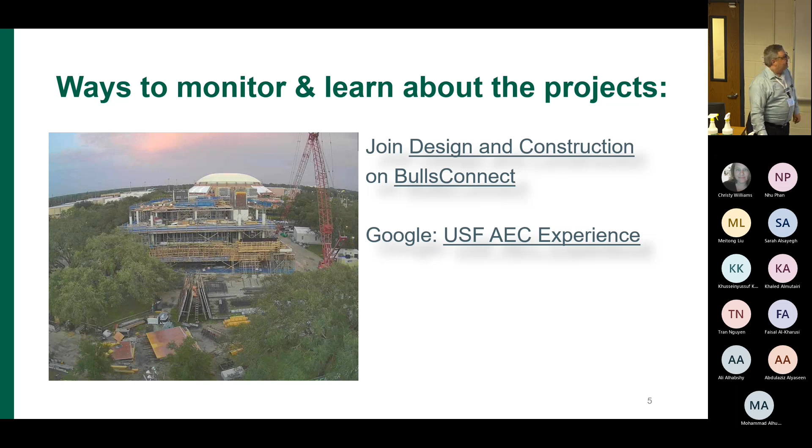So I'm going to turn it over to Dylan and let you talk about general ideas of the different structural systems. And did you happen to see how many do we have online? I saw one, there's at least 3 or 4 online. Oh excellent, good, all right. And then we have one student in the room. So welcome, one student in the room, a bunch of engineers in the room, and I do know that when we post this on YouTube, it does get additional views too. So okay, outstanding, all right.

Well thanks Steve for the setup. Online, can you hear us just fine? Yes, great, thank you. All right, so start with just a general overview of structural systems and kind of the different structural systems that are out there.

And then we're going to go from there and actually talk about 3 specific buildings on campus that Steve mentioned, and talk about the different systems that were used for each and a little bit of why. You know, every building really based on its layout and the market and the contractor that we have building it kind of has different needs. And so that's why when you go around and see jobs under construction, you see all kinds of different materials out there. So we'll just start kind of from the basics.

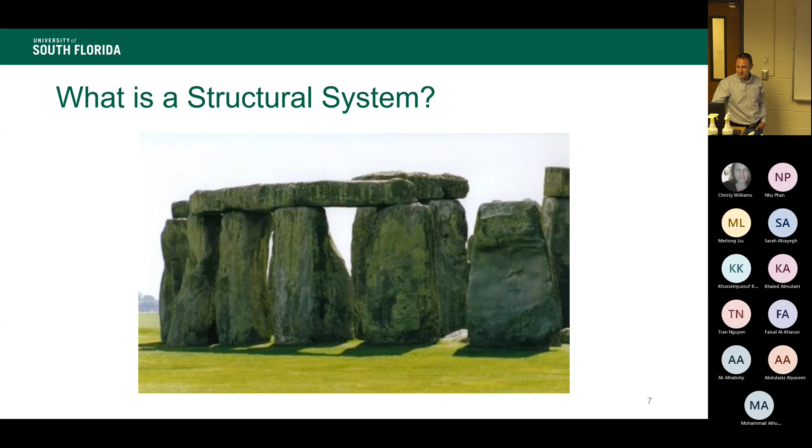You know, what is a structural system? You know, this is obviously a very old structural system, but one that's standing the test of time nonetheless. So in its simplest forms, your structural system starts at the foundation, right? You're at the ground, and this is what your building is going to actually sit on and transfer the weight and the loads of the building down into the ground.

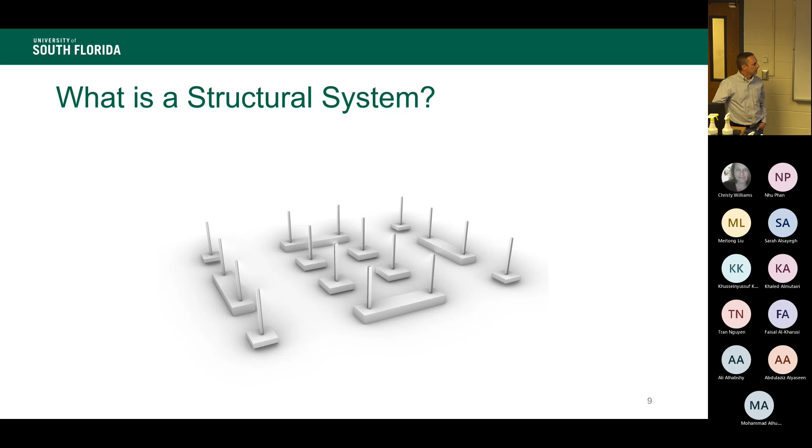And then on top of that, we would have vertical elements, which we are calling columns. And the columns are what take the load from the floors. So floors can be framed out in many different ways. Right here is an example where we have a series of beams. In this case, these would be steel beams, but they could be concrete beams. So these are intended to have the load that your tables, your desks, the people that are in the room, it takes all that weight and gets it out to the columns down to the foundation.

But to just have a building up like this, there are ways you can connect the beams to the columns to keep the columns from wanting to just topple over. But oftentimes what we use is bracing.

So here I've turned on what we call X-bracing, for obvious reasons. Sometimes in the place of those we actually have walls, and those can be done out of concrete. What those are intended to do is keep the structure from wanting to topple over when wind blows on the building, or if you're out west, seismic activity wants to shake the building.

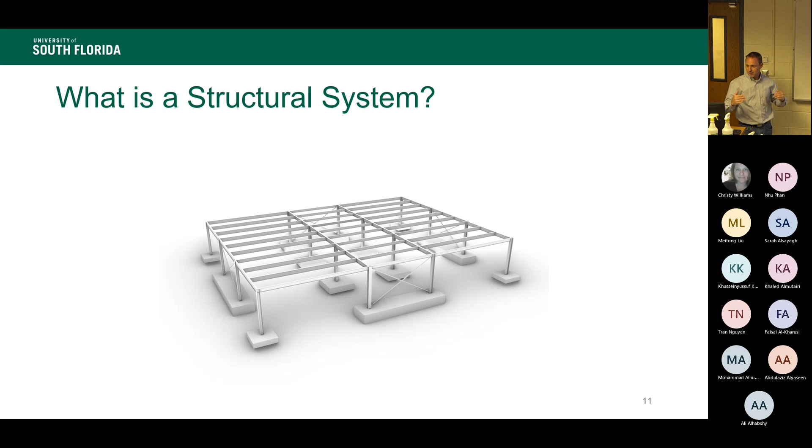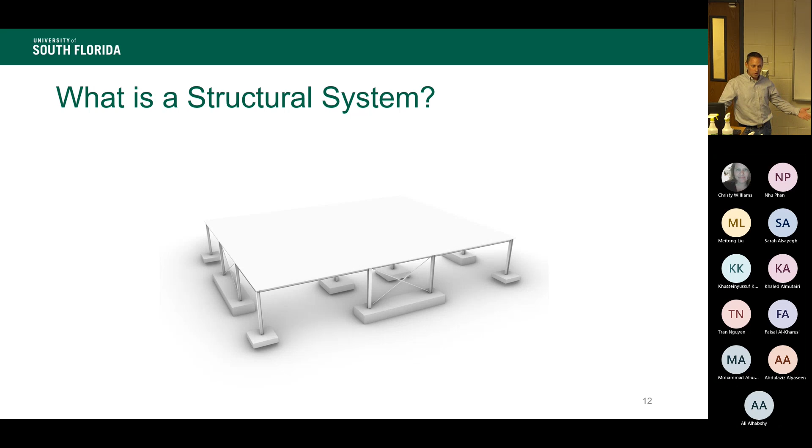This is what takes the load from the floor levels down to the ground. And then we tie all these together with the floor system. Oftentimes you end up with a concrete floor, but it could be wood, or made of several materials. This is the actual working surface, whether it's where a person walks, or the roof on top of the building where your envelope is.

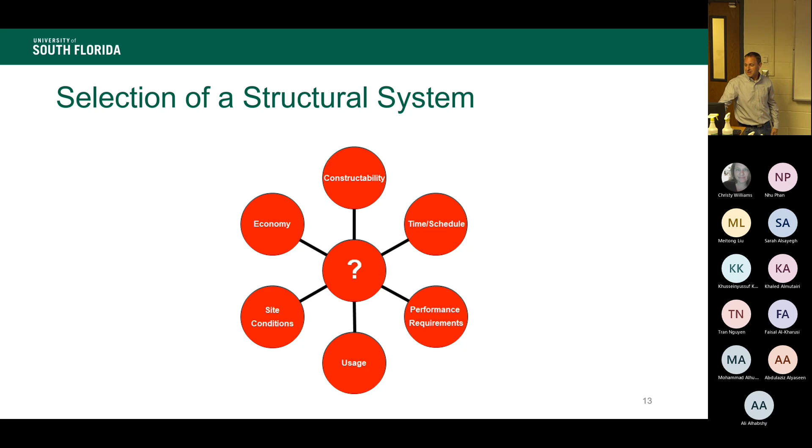So the selection of a structural system, as we said earlier, many things can go into that. A lot of times it's time and schedule. Sometimes it's what's required for this building to perform its intended use. The site conditions, the daily economy, can change. From one year to another, a building might be better for steel, and the next time might be good for concrete. But where we always start is, what's the use?

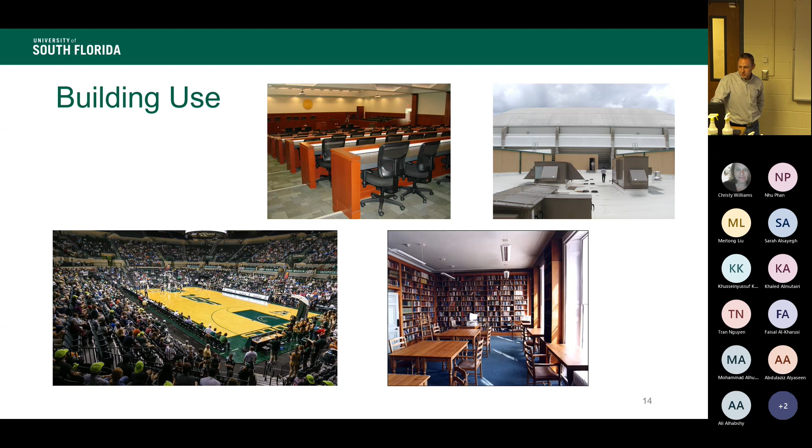You can see here we've got a courtroom, which has a few people in it spaced out. On the upper right, that's a roof, so there's not going to be a lot of load other than the mechanical equipment. Lower right, you see a library. Libraries are actually, although they're quiet and not real active, they require quite a bit of load because the books are pretty heavy. And then we have our Yuengling Center -- I still call it the Sun Dome. That's going to stack thousands of people in it at one time, jumping around and having a good time. So we first have to understand what the use of the building is and how it's going to be loaded.

Then we want to take a close look at the economic considerations. So what are materials costing? Right now we're in a time period where material prices are really going up high, and they've escalated. So on new projects today, material cost is very critical, because it could actually make or break a project. What labor is available out in the workforce, and what equipment is needed.

How quickly is the building needed for the owner? One of the buildings we're going to talk about is the new indoor practice facility for the football team. It's needed very quickly because we got a great new coach here, and he's looking to build and do new things, and it's critical for our recruiting to have that building online as quickly as possible. So schedule is really important. And then maintenance costs -- we have to not only look at building it from the beginning, but also how well this building is going to be maintained, and what it's going to cost to maintain over its life.

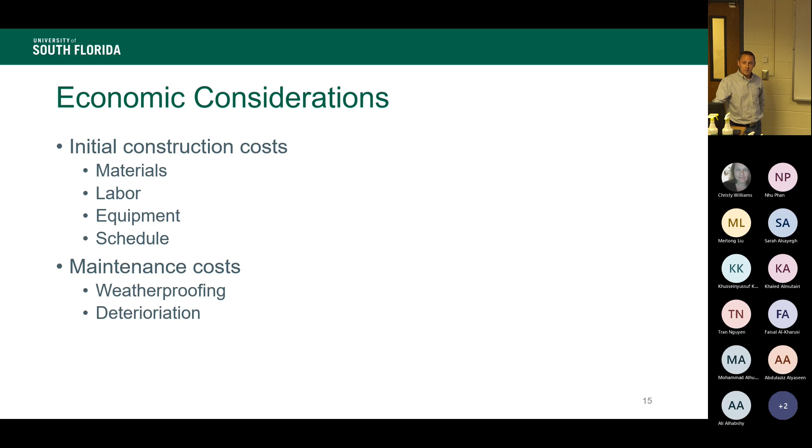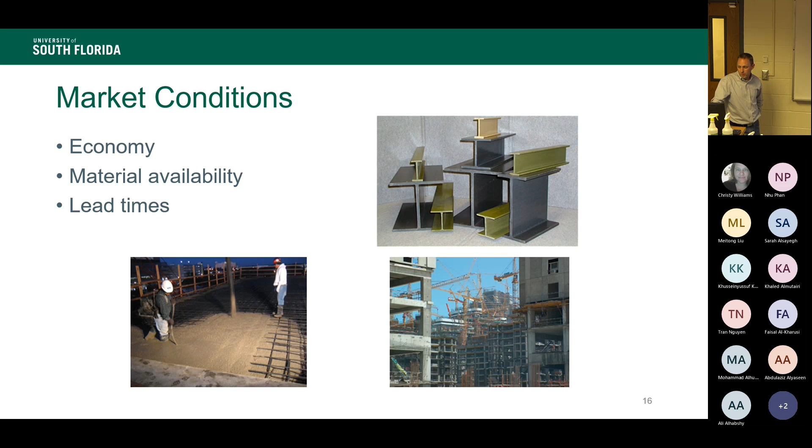So those are some market conditions. The economy weighs into it. What materials can we get? How long does it take to get the materials? These all weigh in, along with the schedule.

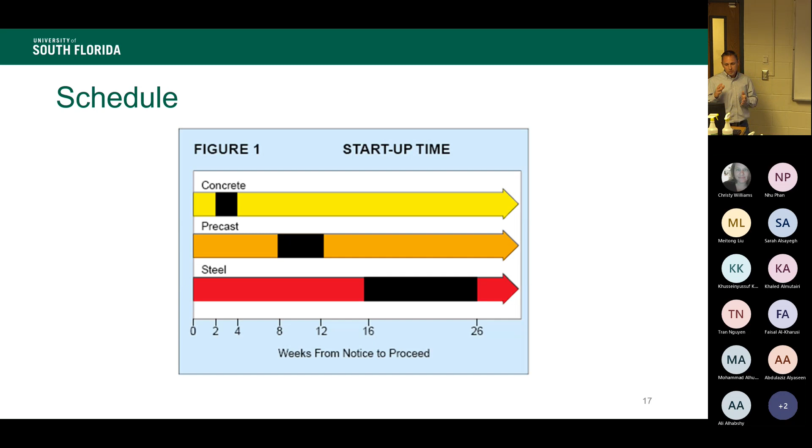Sometimes we look through different systems, and a couple that are pretty common are concrete and steel. Precast is a form of concrete -- that's concrete that's cast off-site and then brought to the site in pieces. But a concrete job, like the USF Honors Project, they can get out and form and start to pour pretty quickly. Steel has a lot of prep work that has to be done in a shop, so concrete can get going real quick. Steel takes a little longer, but it can actually be erected very quickly. So those are things that have to be weighed into when we talk about schedule for buildings.

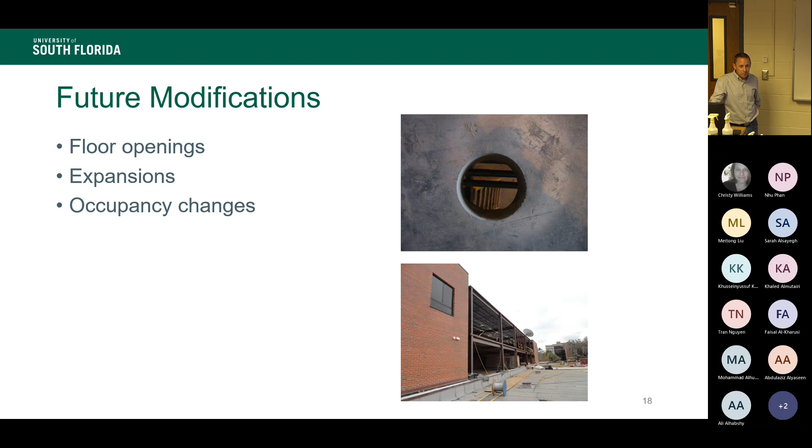And then we do have to look at what future modifications this building is going to need. Are we going to have to cut new openings in it at some point in the future? Are we going to have to expand the building? Is the type of usage, the occupancy, going to change at some point? So these are all things that are good to know up front as we select a structural system.

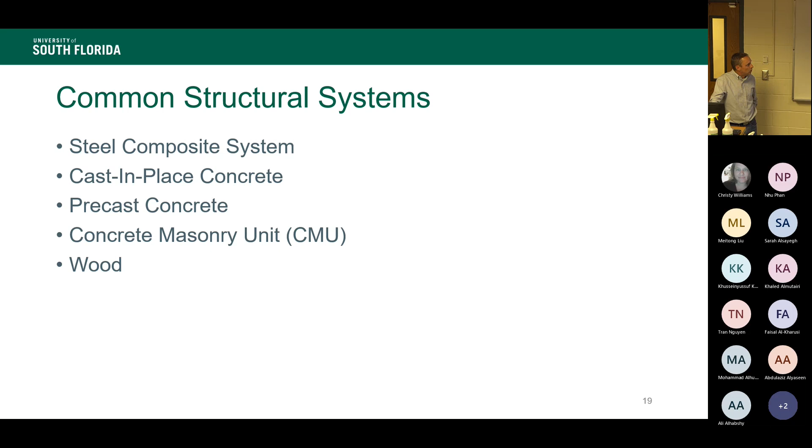So the common systems are steel, cast-in-place concrete, precast concrete, masonry units -- concrete masonry units, also known as CMU -- and then wood. So just real quick, let me give you an image of some of these, and this should start to stand out for something maybe you've driven by on job sites and seen before. So this would be an example of a steel building.

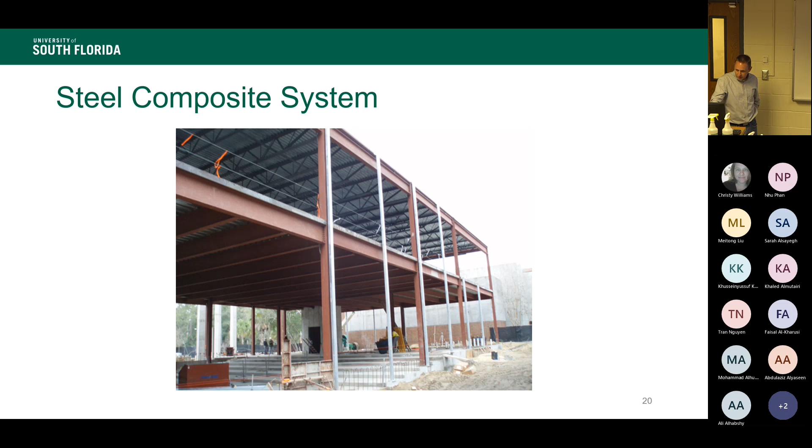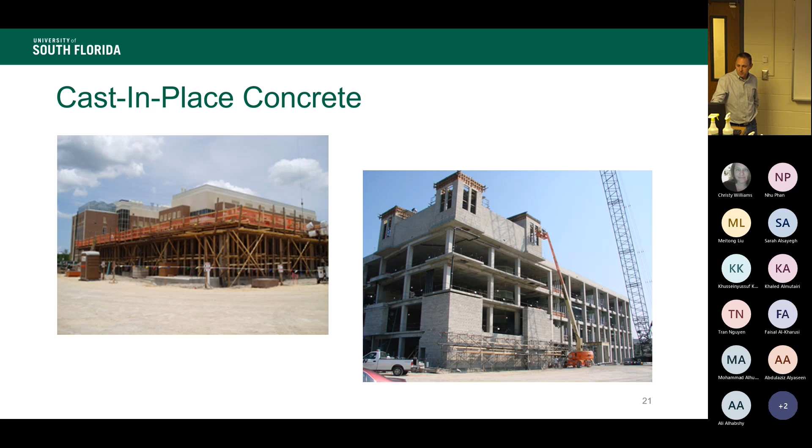Here we have an example of a cast-in-place building where you see a lot of posts and shores and forming, and then the concrete gets cast onto it.

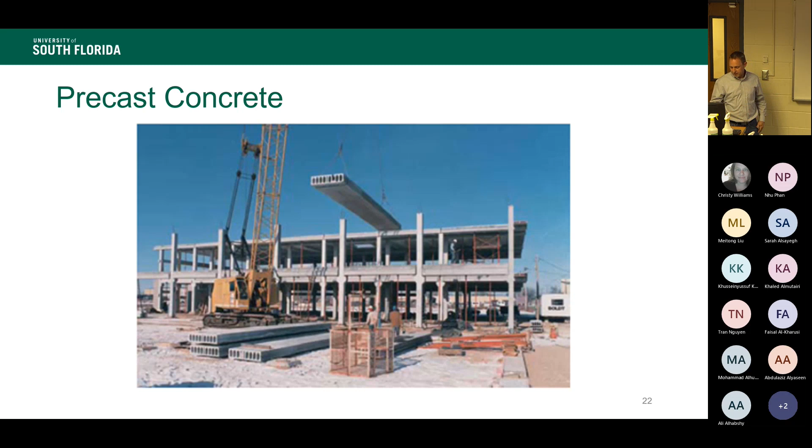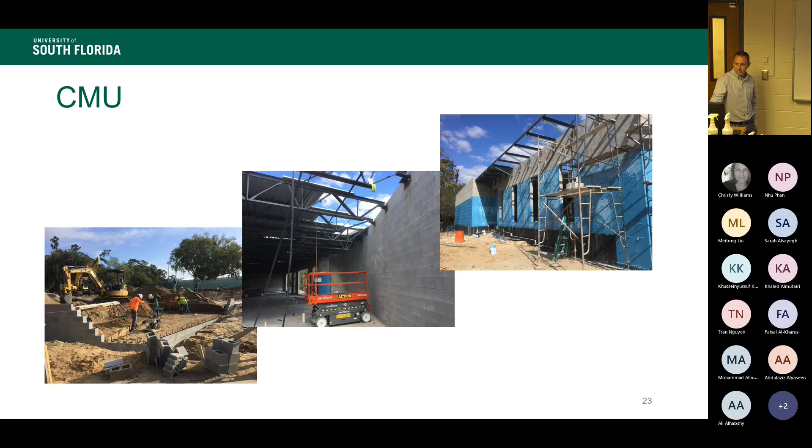And then there is wood, by far the most sustainable of all the products. Wood you see a lot in residential, but it's starting to make a pretty big comeback in commercial as sustainability is becoming more real, and our emphasis on the carbon footprint becomes more critical.

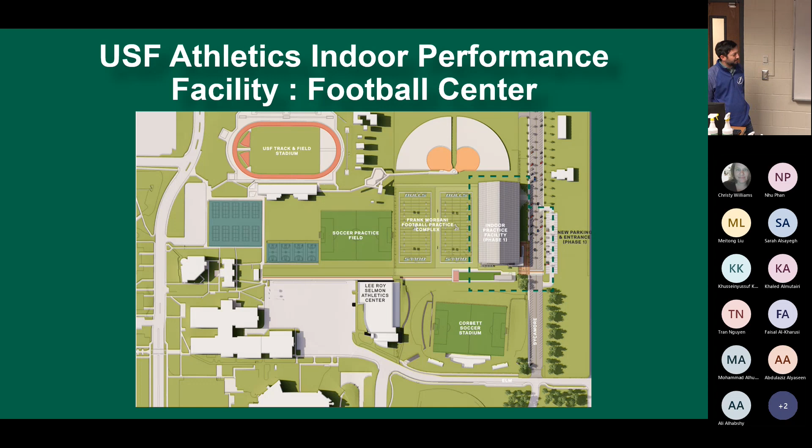So the performance facility here, it's over off of Sycamore Drive, and I think it's going to serve a great need on campus. Florida's climate is one thing, to be performing or practicing outside all the time. So we're going to put in a new indoor facility over at one of the current outdoor practice facilities.

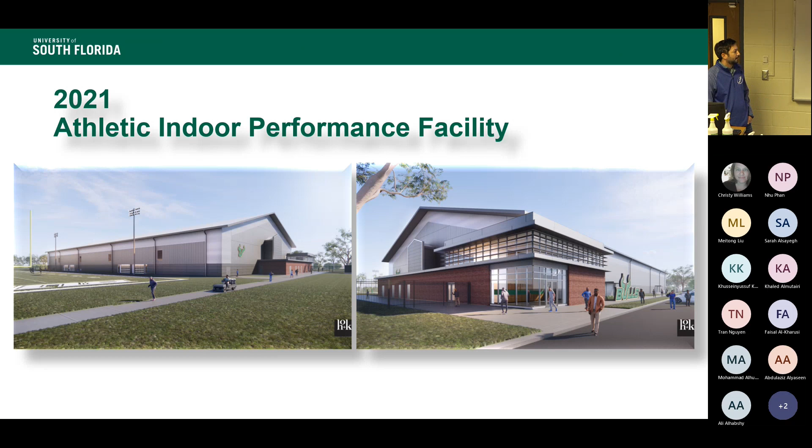And we, as the engineer of record, have defined everything for this pre-engineered metal building. We've defined design criteria, all of the dimensions, elevations, grid dimensions, size, spacing, all that type of stuff. And then a pre-engineered metal building supplier will have that information delegated to them, and then they will provide the design for the building.

The reason it works that way is these guys have a turnkey system that's very efficient. They design, they engineer, they fabricate, they erect this building. And as Dylan mentioned, schedule is always a big component for this type of project, and this type of large facility can be produced pretty efficiently by these pre-engineered suppliers.

If you think about the function of the structure, there's not a lot of building types that could span over a football field, both width and length. A lot of times you'd need to drop in columns, that type of thing that is not conducive to what's going on inside this building. You've got football practice, you've got people kicking field goals, that kind of drives the shape of the structure.

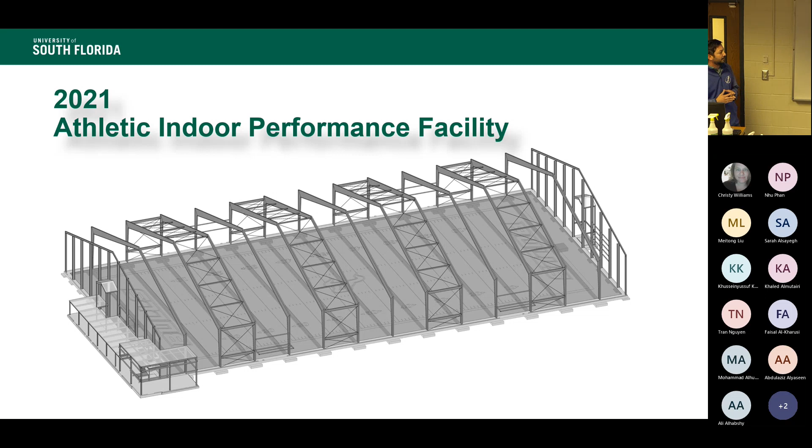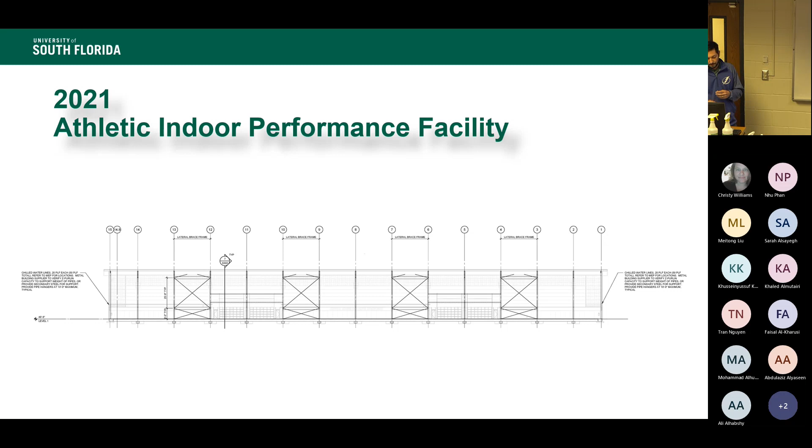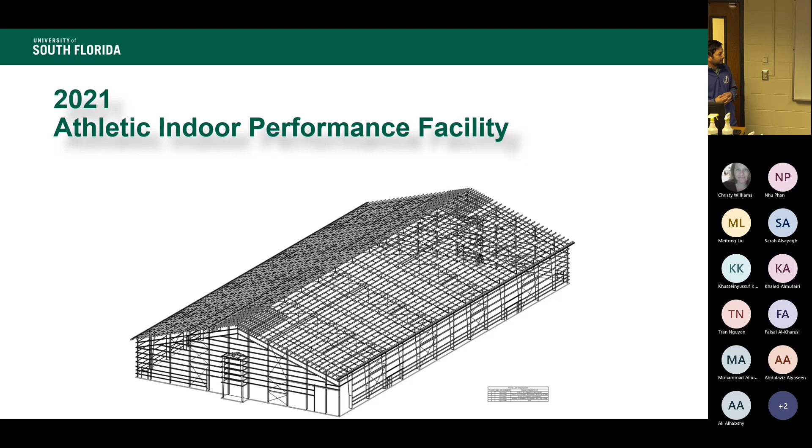So unfortunately, this structure is not under construction yet, but we do have right here in Tampa, One Buc Place, which was built in 2017. Happens to be the same metal building contractor, Canco, was on this structure as well, and we were the engineer of record on that. So I have some photos to show the construction of that structure. I don't know if you've been out there to see it, but it's a pretty cool building.

It's the same contractor and the same shape. Why would the structural members be a little bit different? It's the same contractor, but it wasn't the same engineer - they used a different engineer for that. And then there's also a lot of different cladding on this one, they have a lot of glass down low around this one. The Bucs building was 95 feet tall and had a little bit wider footprint. The actual metal building manufacturer is a different manufacturer too. That's right.

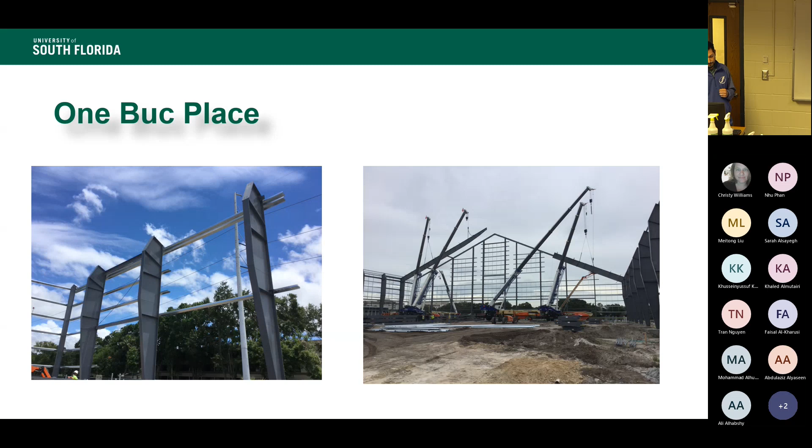So here is the same building, a little bit further along now. You can see all the frames down the length of the building have been erected, and they're starting to do all the infill members, the roof purlins, the Z-girts here on the right-hand side.

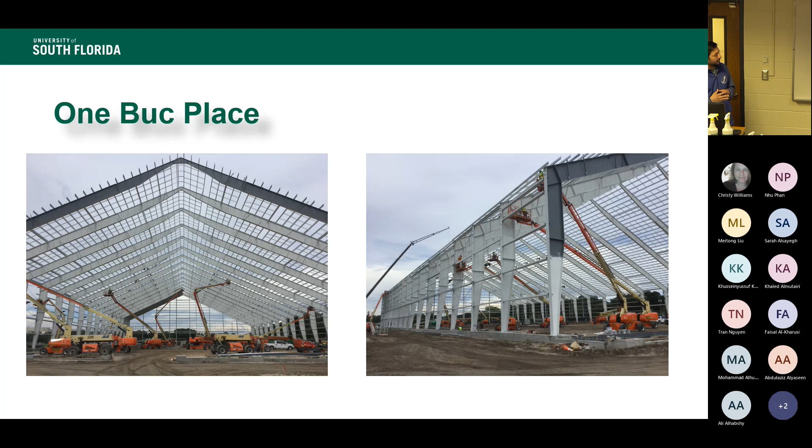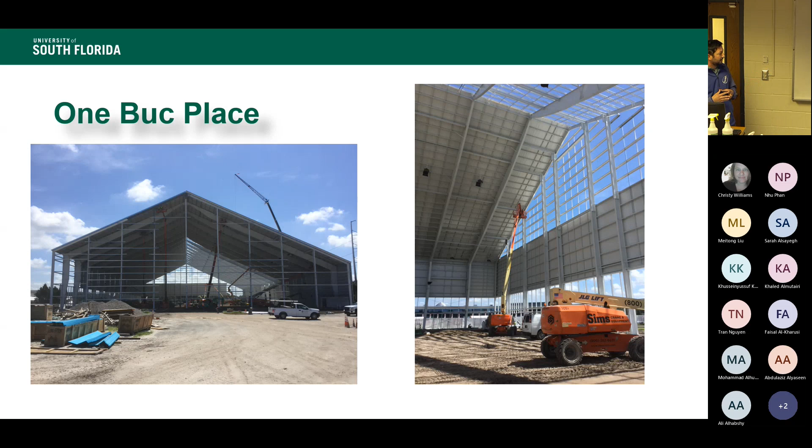And a little bit further along still, they're now starting to clad the building. They've got the roofing system - I forget what it was on this, if it was just metal panels or a different type, but it was insulated metal panels. And then they'll start to enclose the walls and the sides with glass and all that kind of stuff.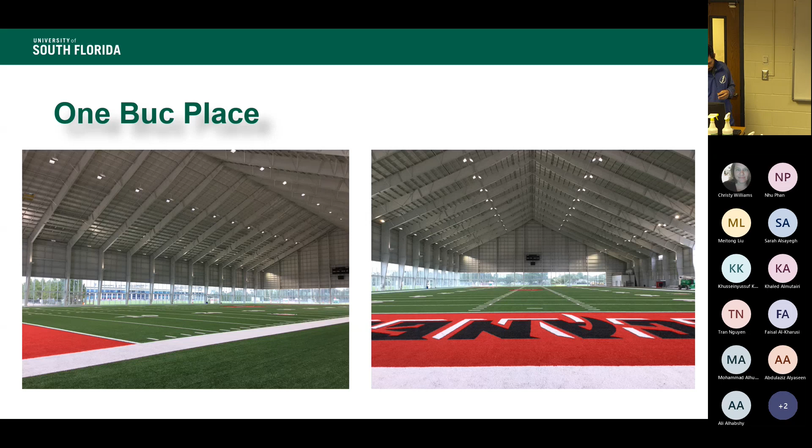And finally, the finished product. You can see here how they integrated the glass that looks out onto the outdoor playing field, the lighting, and some of the things that hang from the structure that add to the loading. And that is what I have.

So Bill McNally was going to present the Student Wellness Center, but he's not available today. So I think Richard Temple is going to jump in here for us. I'll try to wing it. Which Richard? Down here, is this where we - yep.

Okay, standing in for Bill McNally. Bill McNally has been with Walter P. Moore and Associates for 10, 12, 5, it's more than 5 years. Outstanding engineer, but he deserves time off, so he's not here today, and I'm standing in for him. I've been with Walter P. Moore for far too long, so.

We've done a lot of projects at the University of South Florida. The student wellness center was one. It was a design build process. The selection is a pretty competitive process by which each contractor gathers their team of architects and engineers and submits their qualifications. The qualifications are reviewed by university staff and facilities, a short list is developed, those firms are interviewed, the best qualified is selected, then there's a negotiation process, and off we go with contracts, then into the design and details. That's basically the process we went through on the University of South Florida Student Wellness Center.

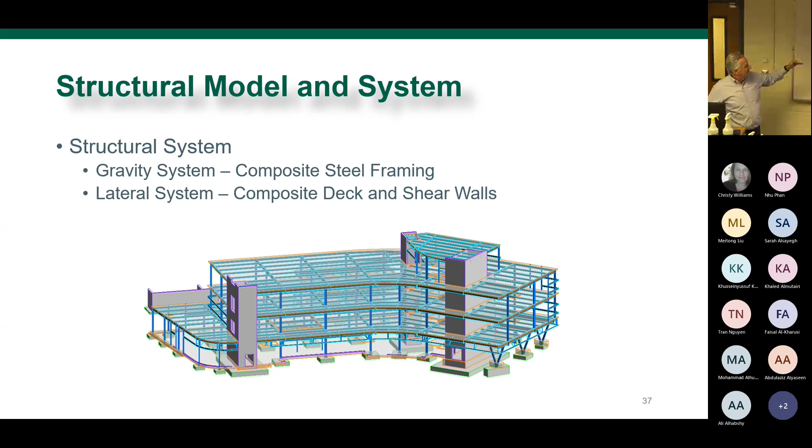For the floor framing system, on some projects we actually use concrete, or we will use precast panels. In this particular project, we looked at steel, and we looked at different spacings and refinements of what the steel structure would be about. So this is the overall system, the gravity system you're seeing in blue, the beams, and then the lateral load system.

Dylan already touched on sort of load path. As a structural engineer, we have to figure out where the floor loads go, where the wind loads go, and how they get down to the ground. So progressively, we look at the composite metal deck, which spans between the beams. Then we look at the actual individual beams, then the girders that support those, then the columns, and onto the foundations.

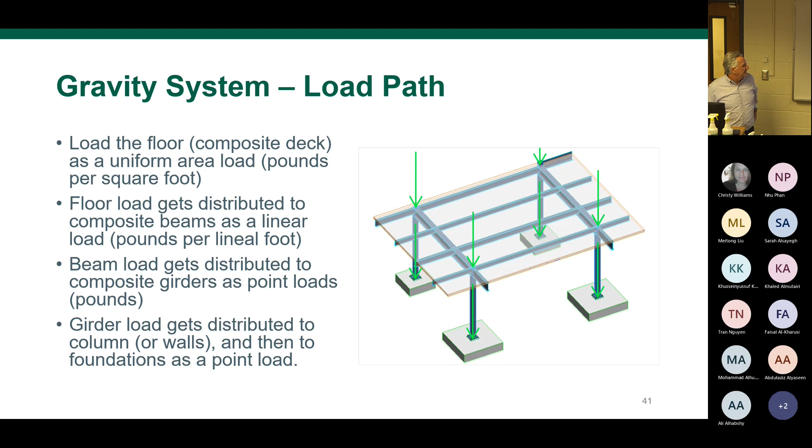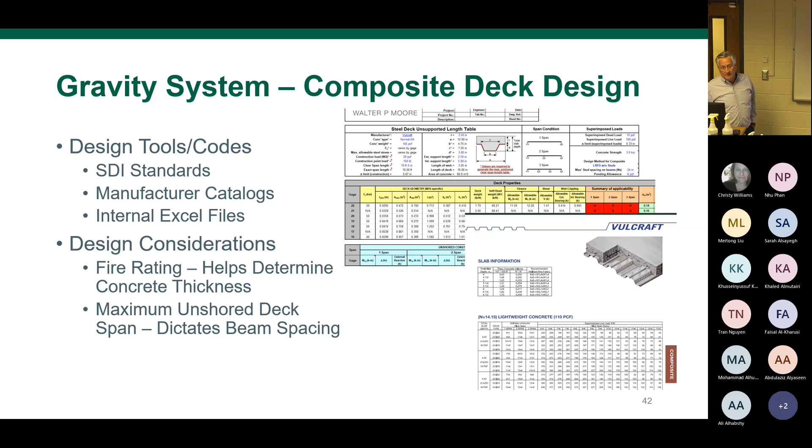We have some pretty sophisticated computer programs now that will analyze a wide variety of options to try to optimize, once you've selected steel, what the best system would be. There's also a lot of standards associated with Steel Deck Institute standards, what the deck should be, what the gauge should be. So we compare that and determine what's the most effective and cost-effective system to meet the criteria for deflections, vibration, and various other requirements.

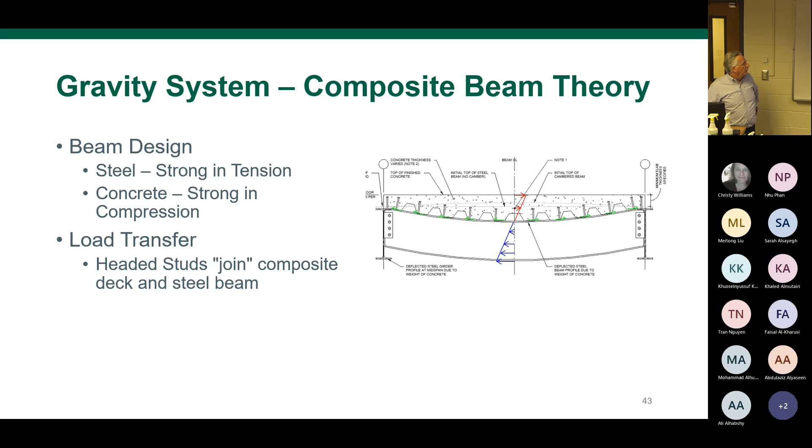So, very detailed drawing here. Steel is great in tension, and concrete doesn't work in tension unless you put reinforcing steel in, so it's great in compression. Composite floor framing basically ties the two together. Concrete in compression tied with these headed studs, as they're called, the vertical elements, to the steel, will make for a very efficient, shallow, and very stiff floor framing system. So this is a very effective system once you've decided to go to steel.

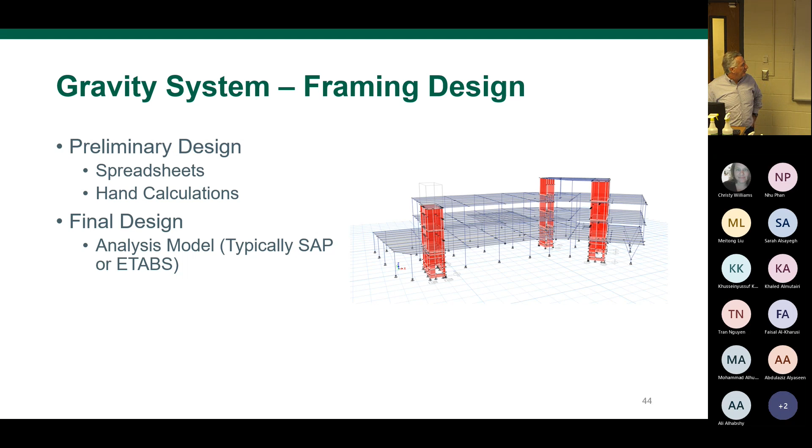Going back to the programs that we use, there are various computer programs. As a company, we've sort of focused in on Computers and Structures as the basis, the family of programs that we use to analyze buildings. In this particular project, we use both SAP and ETABS for different components, and they tie together and talk to each other. We use our own individual spreadsheets and hand calculations too, to check. You should always check exactly what a computer is telling you in terms of the output, because there can be some strange results sometimes. So it's always best to do hand calculations.

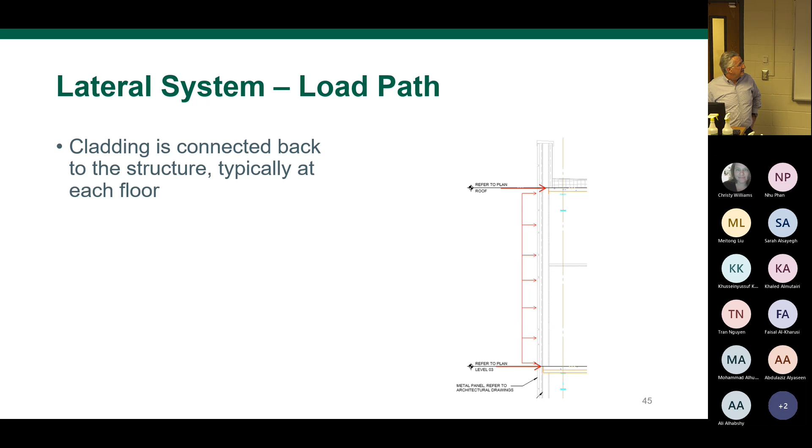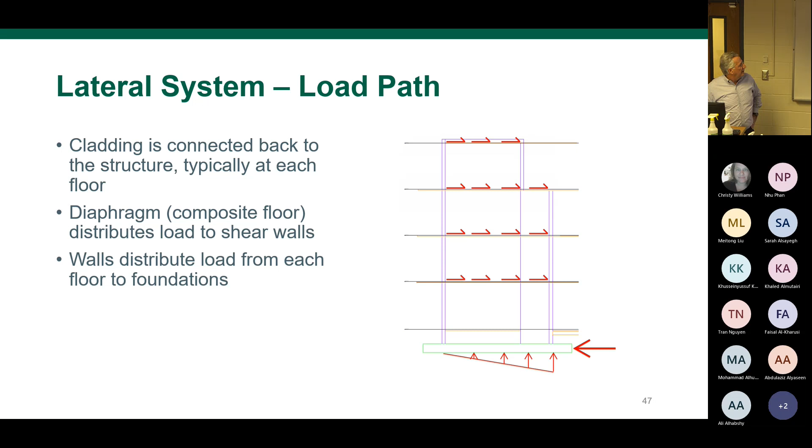Wind load on the exterior, obviously from hurricanes, very simplistically here. Whatever the exterior wall system is, whether it's brick, glass, or metal studs, that load has to get transferred into the floors, and then through the floors, through a diaphragm design as we call it, into the concrete shear walls, which basically provide the overall stability of the building. So that's the load path we go through as an analysis. That's a critical component to start the design of a building, working closely with the architects.

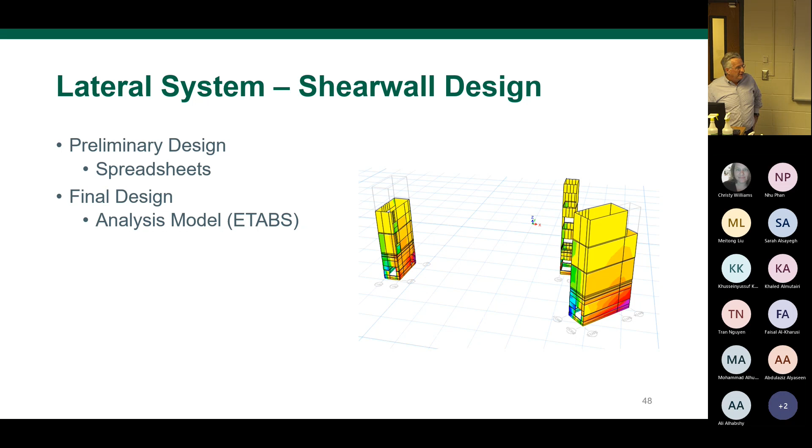So anyway, that's it, that's the wellness building. Now USF honors Mr. Anthony DeFurio. Hi, I'm Anthony DeFurio, I am the structural project engineer for Honors College.

I kind of jumped in on the project maybe about halfway through. There had been about a year of design, kind of the process that Dylan was talking about, looking at different systems, different materials, and all that kind of stuff. So when I got started, most of that had been settled and we just needed to figure out how we were going to make everything work.

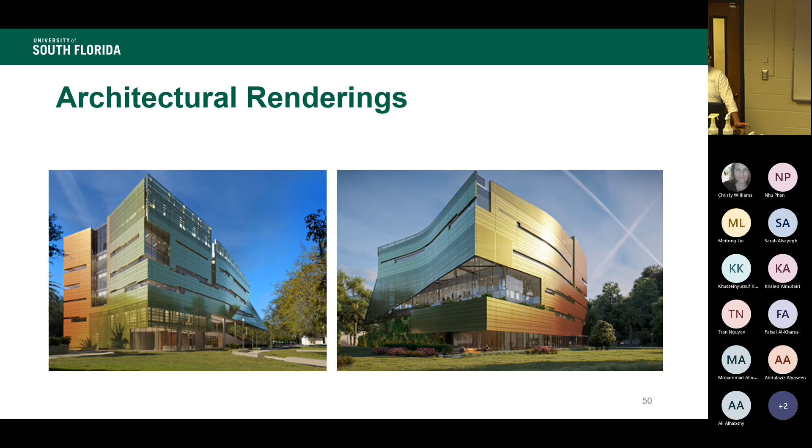Walking you through the overall process of actually building a building: usually you start off with the architect drawing a pretty picture that everybody really likes and looks incredible and wants to be in. That's kind of where we get started. We take a look at these pictures and start trying to figure out where we can fit structure and where structure is needed. We use a computer program, typically something called Revit, that will build the whole model for you to look at and put everything just so where you need it.

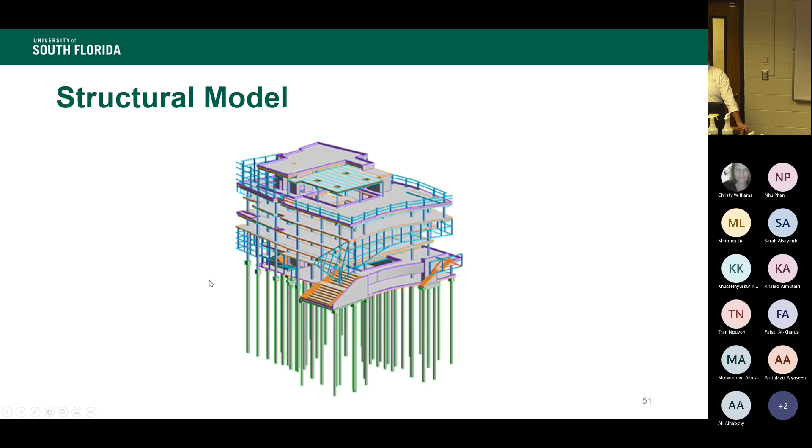We use that to tell the contractor what you need to build, what pieces you're going to need. Once that structural model is completed and the drawings are made, and we know how much reinforcement needs to be in the slab and what size the steel beams need to be, we create a fabrication model. People will go through and read our drawings and model pretty much every single stick of rebar. In the case of a concrete building like the one you see here, that's needed for the supplier to actually manufacture in the factory and ship out to the site.

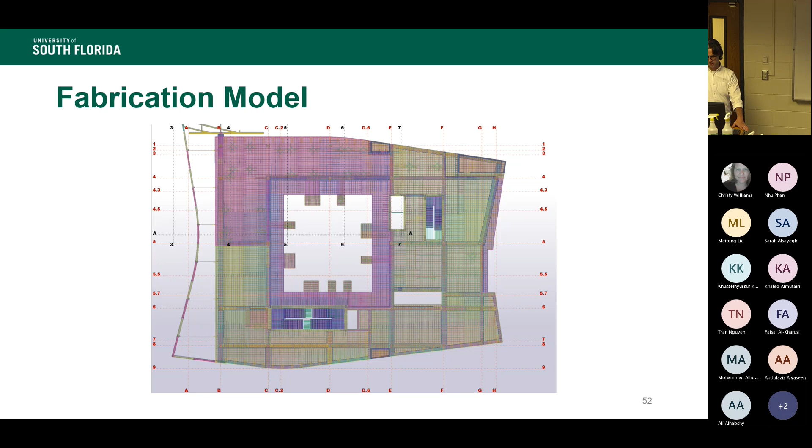So to start with, when you're building your building, you start on the ground, and these are the foundations of the Honors College building. There's a lot of back and forth about this. The site is very not good. I think the geotechnical engineer who took a look at the site said it was the worst site he has ever seen in 30 years. That sound about right? And that's saying a lot for Jamie. Yeah, he's done a lot of work.

And so eventually it was settled on doing drilled piers. Kind of a little side note: when we were trying to give estimates to the contractor for how much concrete to expect, we were told to tack on a 3-time multiplier for the volume of the pier. Basically, if we say we need a 2-foot wide pier that's 50 feet long, we should plan on actually placing enough concrete to make a 2-foot wide pier that is 150 feet long, just because the concrete was going to seep out into the ground below.

So yeah, what's in the ground is drilled piers, that's all these tall circles you see. In some places where we have our big lateral elements that other people have talked about, those big shear walls, we tie the pier groups together so they can function together and perform a little better. And then for smaller things, there's a couple of canopies on either side of the building, and there's a big monumental stair in the front, where we do strip footings, which just sit on top of the soil. They don't have a lot of load, so they don't need to get down to limestone or anything like that.

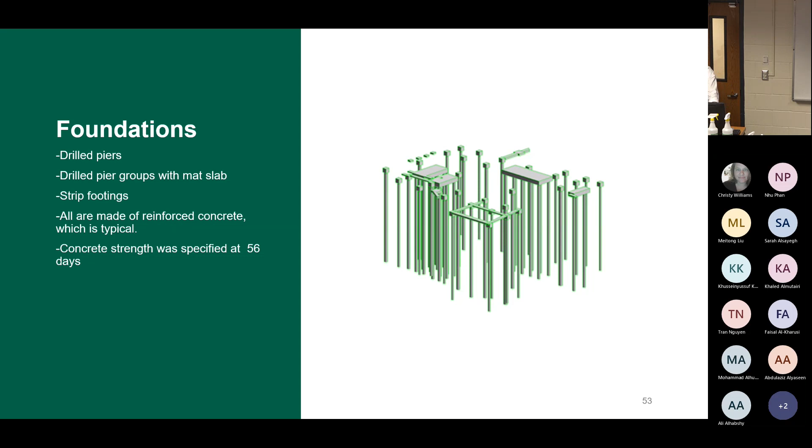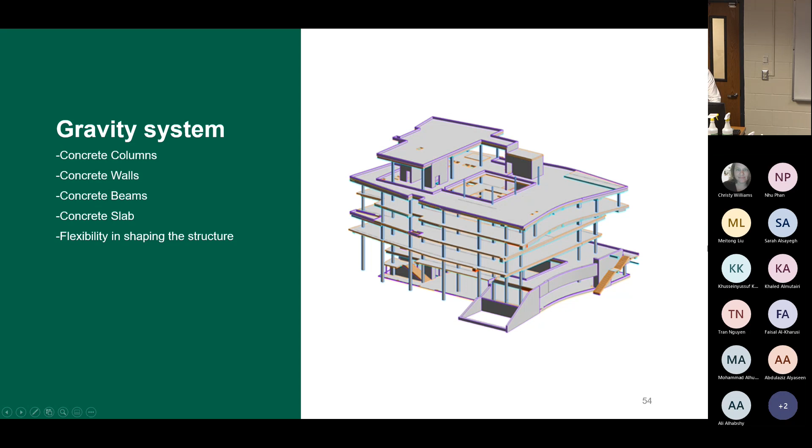Now we come up to the gravity system. This building is a little different from the other two you've seen in that pretty much everything is concrete. The columns are concrete, the walls are concrete, the beams between the columns are concrete, and the slab doesn't have a metal plate or anything like that—it's just concrete. This was done in part because the building has a kind of swooping appearance that can be hard or very finicky to do with steel. Whereas with concrete, it's a fluid, so as long as your formwork has a nice curve to it, the concrete will too. This allows you to get those nice curves you see in the building up here at the roof.

Moving on, here is the lateral system isolated from that structural model we saw earlier. They're all concrete shear walls, made of reinforced concrete. We like them because we can put them around elevators and stairs, and they'll stay out of the way of the architect. If we were to do something like a braced frame, we'd have to find a wall to put it in and maybe wrestle with doors or something like that. But with a shear wall, there's always going to be a wall there—it's required by code as part of the fire safety of the building.

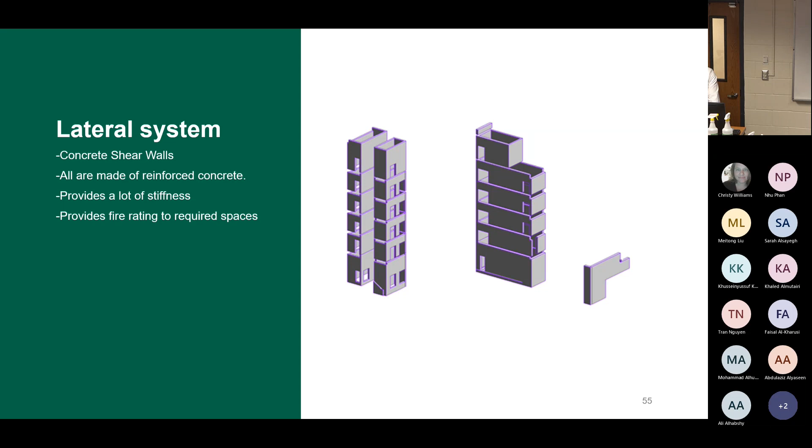So this was a project where these shear walls really helped well.

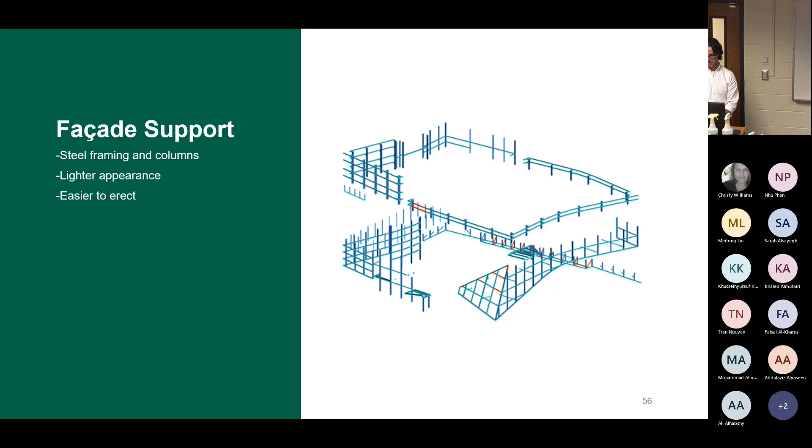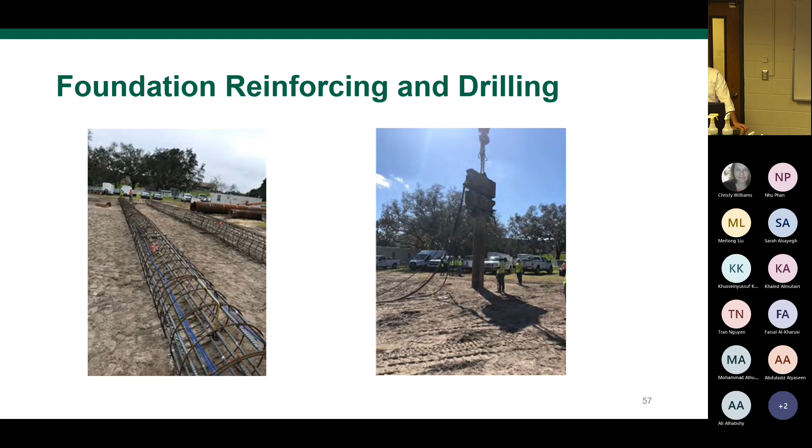In the picture on the left, you can see the reinforcement for those piers. As you can imagine, they're very long, so they get poured and tied together. Then the hole is excavated—in this case, we used an auger or casing, drove the casing down into the ground, removed the soil, and then set the cages in.

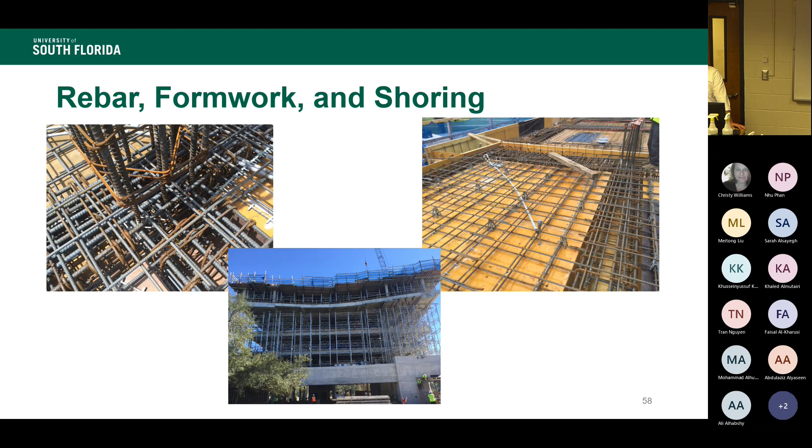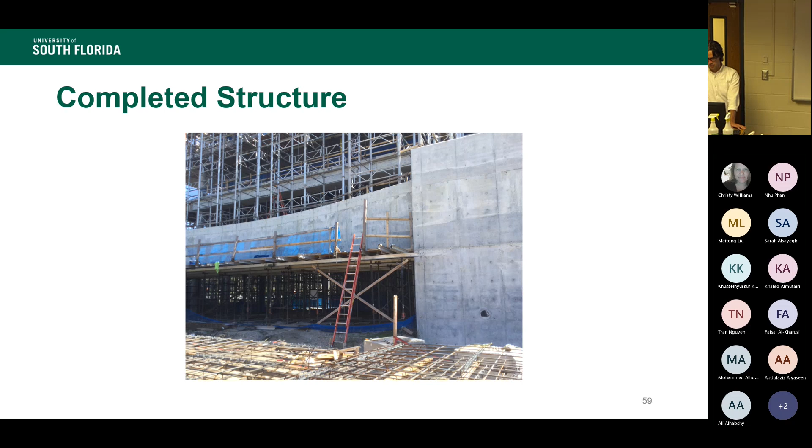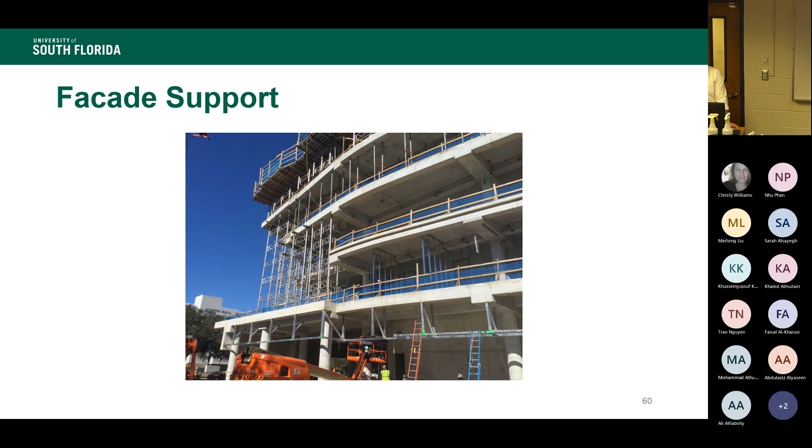And here's a picture of the facade support that's going in. This is saved for last, structurally speaking. That's all getting put in place, and that'll be holding up some glass and other facade. And so that is the USF Honors Building. So now I'll turn it over to Brian and Chris.

Some more questions? Sorry, no you're okay. Ahead of schedule, we're a minute ahead of schedule? One minute. I'm gonna take my... Guys are in for a treat. Yeah, we got this, Chris. Got this. You all get to witness my professorial debut, so birth of a legend.

My name is Chris Clater. I'm the Senior Project Manager for Beck, in charge of the USF Honors College project. I'll be taking this section for my boss, Brian Wilson, so hopefully he gives me a good bonus this year.

All right, quick question for you. Get to be the sole person in the room. Discussions regarding project design and budget should include which of the following stakeholders: owner, client, design team, construction team, or all the above? I'd say probably all of the above. Man, right on track, was a tough one, but yeah, for sure. All the above. So we've heard Walter P Moore talk a lot about the decisions that have to be made to get to a certain point, right? What type of structure do we need? And even if we can hone in on what type of structure, what does that actually mean?

They actually launched the... Oh, polls. Nobody heard the answer. Find out who was listening. If anybody gets this wrong...

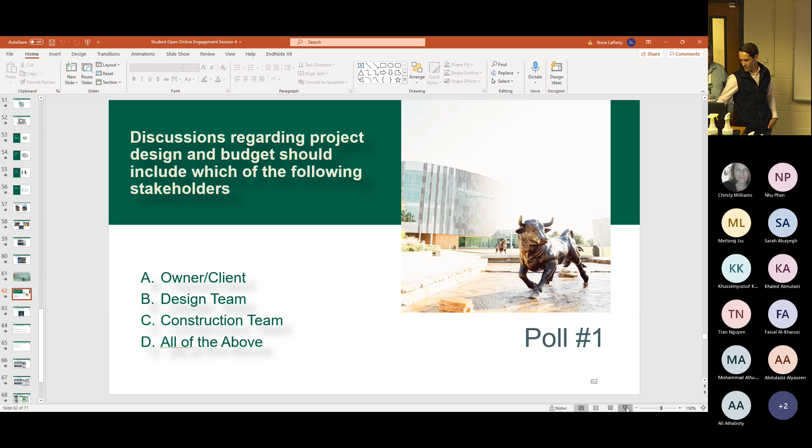Hey, 100%. All right, I'll take it. Everyone's paying attention, everybody's listening. I love it. All right, I was just one person in that. There we go. Sweet. All right, okay. Thank you, Mr. Lafferty.

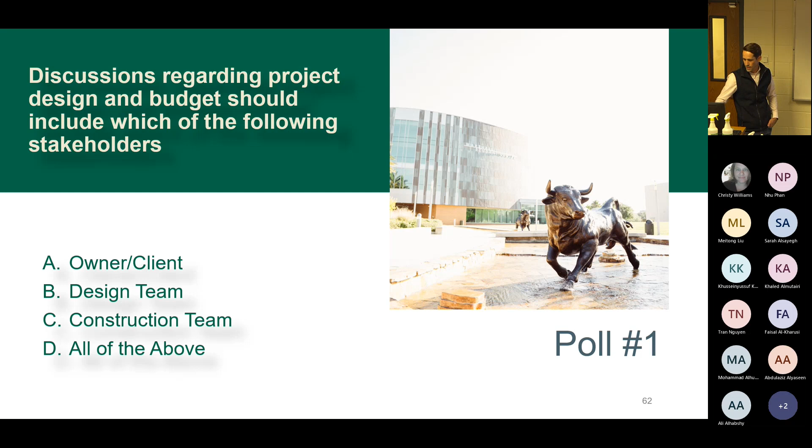So we definitely wanted to take just a minute and chat through how decisions are made sometimes. So why is collaboration critical?

I'm sure you guys will all have a simultaneous eye roll with this next slide. Knowledge is power. It is almost as annoying of a saying as teamwork makes the dream work. Doesn't make it any less true. Knowledge is definitely power. So the more knowledge, the more information, the more different perspectives you can bring to a decision-making process, the more informed that decision is going to be. So all information is important. No matter how big, how small, it can and should in some contexts be taken into consideration.

So this is just a quick list. By no means is it comprehensive, and it does jump across lines, so to speak. A lot of times from the owner's perspective, project goals, metrics for success, hypercritical, right? What is important to the client, right? That should be a key driving force behind any decisions. From the design team, design intent, performance requirements, how does this structure have to perform, in what capacity, what's it designed for? And certainly aesthetic requirements, how does this thing need to look?

And from the construction team, cost analysis, market trends, costing, schedule, the typical stuff you think of when you think of construction projects, right? How are we going to build it and how quickly are we going to build it? The beautiful thing about this is the design team can speak to construction components. Construction team has input on design components. The owner gets to talk about all of it, right? They're the owner.

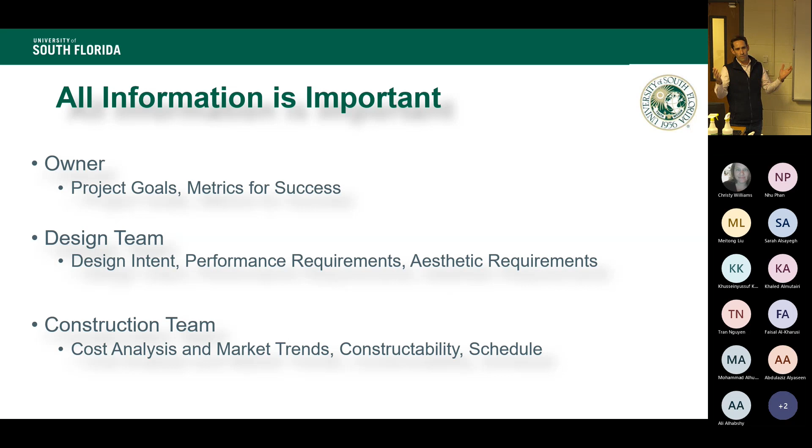So how do we collaborate? How do we make these decisions? Some tools, techniques, traditional workshops, and charrettes. This is what you see on movies and television when somebody is sitting around a table and they throw a bunch of pretty pictures up on the board, or it's sitting around a table or a space, throwing opinions, ideas, and perspectives out there, right?

Trend reports analysis, this is where we get into the meat of stuff, actual metrics, actual data that we can throw out there and use for consideration, and then comparison, right? Lean tools and processes. So lean is effectively a set of protocols and processes that have been established. Particularly relevant for us are the construction processes that have been established. They range across the board from schedule production management to decision-making analysis and so on.

So the lean process that we typically use, it's called an A3. It's a way to level out decision-making guidelines, right, or factors. So we, Beck, a lot of times will take this basic A3 template and add a whole bunch of stuff onto it to the point where it's no longer, we call it an A4, just because it takes it to the next level. We take into account as much information as we can.

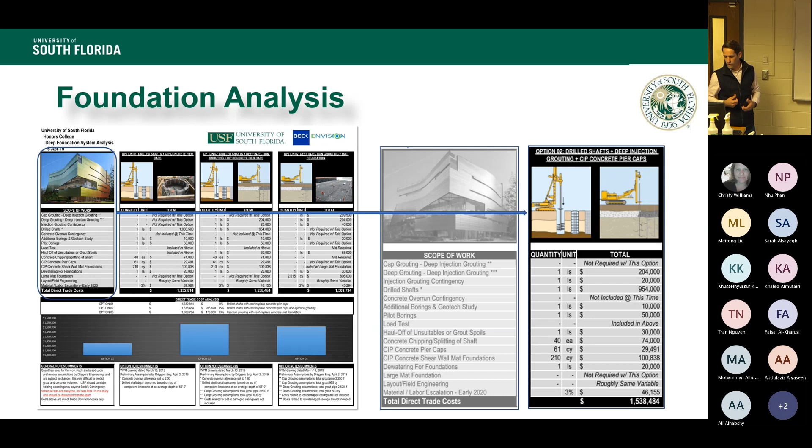Schedule. How quickly can we get this thing built, right? Again, just to hit on recurring themes, schedule is absolutely a consideration for the university. We have to take into account when this building needed to be up and look at the overall project schedule and how that impacted how it is we were going to be able to get this building completed.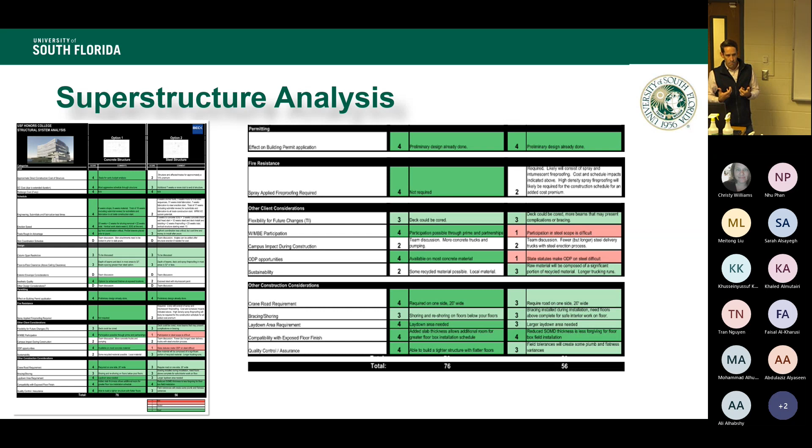This was done not in a silo with Beck, but in conjunction with the entire project team, design team, USF, and Beck, all looking at these different options and criteria and assigning the appropriate values, then coming out aligned on the decision. It helps provide ownership for that decision, so everybody comes out feeling like they had a hand and we're all aligned pushing forward. It makes for a much better decision-making process and frankly a much better project.

That's it. Feel like I killed it.